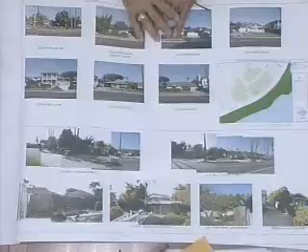So after being out on the site visit, you can probably look at the street scene, and this is the two backyards, and this is a street scene from across the street, another one from across the street, and this is the subject property right here. This is 1212 Shoreline, and 1214 and 1216 as you go up the street. 1218 and 1220 - this house has been approved for a 2-story over the garage, and this is the house next door, and the house next door to that. And beyond that is this 2-story.

So I can go over a few figures. We are at 84.08 FAR, so we're under 85%. This would be the 5th largest of the closest 20 homes.

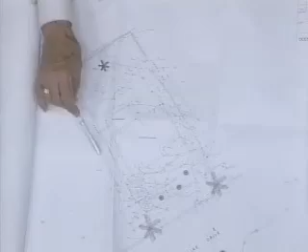So if we go to the site plan, this is the existing site plan, and this is Kathy Corn's property that we visited this morning. And this is a structure that will be demoed, that'll all be demoed, and then the house itself will be demoed.

There are some very large trees here and here, and then along the property line here, there's a very, very thick hedge that runs down through there. And the elevations of the existing house.

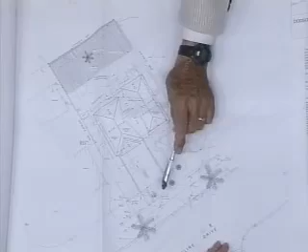So we're going with the underground garage, and the garage itself, the driveway itself starts here. There's a 9-foot city right-of-way at this point that we can take advantage of for the driveway.

On our first submittal, we were right on the setback line. We're at 6 feet here. And after meeting with the neighbor on site, I was able to move the house to 10 feet from the property line.

So floor plan wise, you come down the driveway into the garage. We have stairs coming up that exit to the first floor under the existing stairs. So you come up the stairs here, which is right here, and then you go into the first floor. And you have a kitchen area, dining, living room, and a bedroom here. And then in the back, we have a back porch

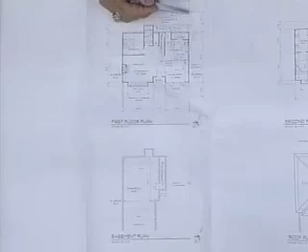That is partially covered by the cantilever of the second floor at this point. And then we have some beams, a trellis running out, which would be nice to plant on, with a little fountain here.

On the second floor, we come up to the second floor at this point, and we have a deck area in the corner here. That's the only deck that we have. Bedroom here, bath, master bedroom at this point.

Upon meeting with Kathy Corn, the owner of this property, I did raise the sill height of this window, and I made these windows smaller. So that would be on this submittal.

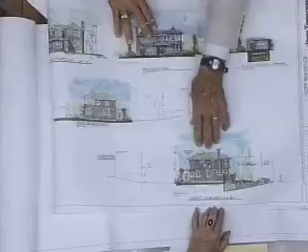And then meeting with her Friday morning, I was able to address this was the bathroom window, which was extending down. It was originally, it had a 5-foot sill. It has a counter in front of it in the bathroom. And so I made that 5'6" to the sill height, and then I made it obscure glass.

These windows here were about 2 feet wide, and I narrowed those to about 1'6" on both of these windows. And I'm going to use the glass that we all observed 2 weeks ago, where you can't see out on an angle, and that's what I planned on using there. I told Kathy Corn that we could make these obscure glass, but the neighbors really didn't want obscure glass in the bedroom. So we're going to use the type of glass that you can't see at an angle.

So this is the front elevation, and this is the deck area here, and a little bay window here. And what I was able to do, I was able to pitch both sides instead of running one big roof across. I was able to pitch it, and then I got a low pitch inside, which made the roof lower at that point.

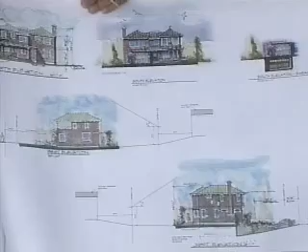This is the rear elevation, and we have a pergola coming off here. It'd be nice for planting to trail across here with a nice small fountain, and make a nice

shady back porch. This is the east elevation. This is the covered deck. I was able to project the roof out on a shed here to cover, comes out about 3 feet, to give the first floor some coverage there. And then we get a small picket fence along here.

This is an elevation of the garage door, which would be probably a darkened color, so that it wouldn't pop out so much, being that it's at a lower elevation. I think it would blend in nice.

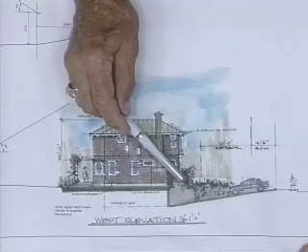This is a section elevation, and we have, this is the driveway going down, and then with kind of a low picket fence along here, which would be nice to trail some plants along to help cover the wall. And this is the back porch with a pergola above.

Did you bring a landscape plan? Not yet. I wanted to submit that at a later date.

How are we doing on the other points there? I think he's covered pretty much everything, he's addressed them. Okay, all right.

At this point, we have a slip here from Kathy Corey. If you'd like to come up and take a seat. Would you turn the mic on, please? You have 2 minutes to speak.

I'm again concerned about privacy, and I think at the last meeting you had suggested that the plate height be raised on all 3 windows. Then I met with Jim, my sister and I met with Jim Friday, and we discussed the plate height would be 5'6" with obscured glass, and that's what we had agreed to between us.

You have to speak right into that mic. Okay, and so now today I see it's changed, and I'm still concerned. I think previously the windows in the bedroom were 24 inches wide. Now they're 18 - actually it says 16 inches wide. A foot and a half. Yeah, they're actually smaller than a foot and a half.

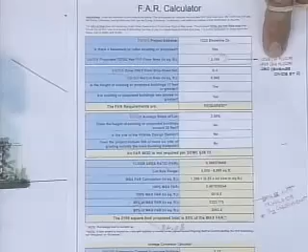Added to the first floor square footage? Yeah, or to the total square footage, basically, but it's added back in on this calculation, which is also FAR, but it's added back in to show where it relates to the closest 20 houses on how large they are.

Are you saying that it's added back in at 50% or 100%? 100%, yeah. Okay, thank you. Any other questions?

You don't show windows here, but I think on your floor plan you show windows on this side? You mean here? No, on the front. Let me see. Yeah, let's put that one. Oops, which way is it? Oh, is that underneath?

Here it shows two windows. Oh, it's a bay, with one off on each side of the bay window. Oh, I do, yeah. Yeah, they face south. Yeah, I do show windows there.

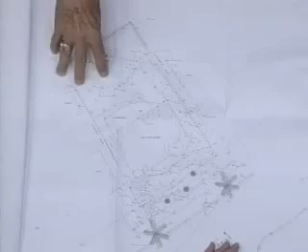Oh, there was a garage. This looks like it was an old driveway, and then they converted that into this, so that's how they got their garage coverage. Yeah, and this is a zoning violation. Right, and under the current zoning code you're required 2 covered spaces, correct? That's correct, yes. Thank you.

On the floor plan, I'm a little uncomfortable with this wall into the neighbors and the windows. I'm thinking this needs to be reduced a little bit, and I actually think maybe these windows should be taken out, just for privacy, because your primary windows should be on this wall. I don't know if it'd be better to have windows in here rather than there, but anyway, this wall I think needs to be reduced and the windows reduced. So that's probably my only comment. Otherwise, it's a nice style home. Okay.

Fred, comments? Yeah, this is a real dilemma for me, a real geometry puzzle. Because after we saw the story poles today, I was a bit taken back by the bulk of this corner, as it relates to, regardless of where the windows are, this yard. Go back to the site plan. Yeah, this yard—if you complete this drawing, the wall of the house comes like this, and then there's an opening for the garage.

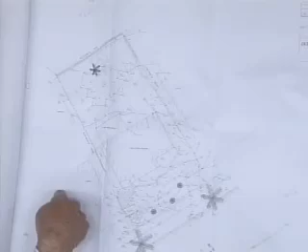That's the only private yard this house has, and we have this big corner that kind of looms over the top of it, regardless of whether it has windows or not—it just looms over the top. And I got to thinking that one of the dilemmas this project has is trying to get this garage under the bottom level to accommodate it. So here you have a lot, and the original house was kind of right up at the setback line, as I recall, and now we've pushed the house back to accommodate that distance to get down under, so you have a proper grade to get to the garage that's below here.

And you have this existing house that kind of does that, so this is not quite accurate. But it pushes the house so that this wall now is really facing directly into that yard, whereas if the original footprint was left in place and you did a 2-story based on the original footprint, that wouldn't be the case—that wall would be facing this piece of the house instead. That doesn't really solve the concern I think this owner has about the way the sun comes up, because in either case, a two-story, whether the house is here or here, is pretty much going to block the morning sun. I don't know that there's any way around it if you have a second floor on this house.

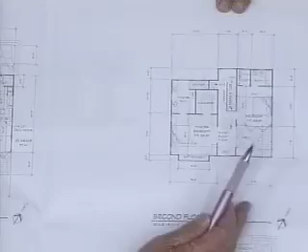One of the approaches is to switch the master bath and the wardrobe to shave this corner down. The other radical approach would be to just put the master suite on the first floor and move it that way.

That's why I was kind of asking about when you're looking at the whole neighborhood, the whole streetscape of Shoreline in this block, if you assume ultimately everybody wants to build a second floor, then how do you arrange the second floors along that street? So that if this corner house wants to have a second floor, where do you put those second floors?

Then you have this house, which is now proposing basically the second floor over the whole house. Then you have this one where Jim has indicated there's a second floor approved over the garage. Then you go down one more, and then this house, which has the second floor kind of like that, because this is where that garage goes in.

So it's about where you start to put the second floors and keep them away from everybody, because the lots are so small and the setbacks are relatively small. So that's kind of what my concern is.

My dilemma is, I can understand the applicant wanting to have 2 bedrooms on the second floor, a master suite, et cetera. It's nothing out of the ordinary, and the rooms aren't extraordinarily big. But the bulk is really bothering me in this corner.

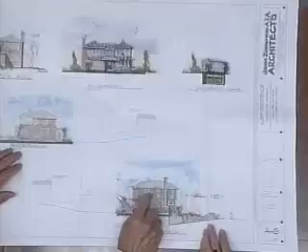So the windows, I think on this side, I would be more in favor of having windows here that were that size and mounted at the same 5 foot, 5'6" height.

Then I really don't care what the glass is, because for anybody to really look out and look across to the adjacent property, if that property has a second floor, they would really have to make an effort to look out that window and then try to look in any windows on that side, if it's up that high.

I shared last time that I've designed several master bedrooms where the bed is on that side, and we put little high windows to let light in. I just don't think those windows, given the circumstances of what we're dealing with, need to be tall and long. I'd rather see 3 of those.

And then if you look at this in 3 dimensions, which, when you're looking at flat elevations, is a little bit misleading, because you have to kind of look at that elevation with that elevation to see the corner.

I think this window is too big. For a bathroom, I think that could be much smaller, because one could stand at that window and at an angle still be able to look into the neighbor's backyard.

And to some degree even from this window, which is in the shower. So I'd like some rethinking about, if we're going to hold on to this corner, the size of these 2 windows.

And I guess I'm not convinced about angled glass at this point. I probably have to see it for me to be convinced. Let me see if I covered all my points.

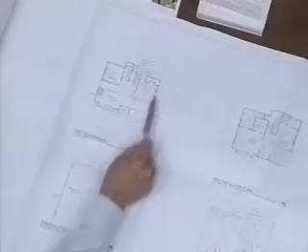On the other hand, if you had a project designed where the garage wasn't underground, then the question is, could you hold the house back at the setback line and create a garage there? That would require rethinking where all this stuff is, or where that bedroom is, because you'd have to get a ground level garage to meet the garage requirements.

By zoning, you have to have 2 covered spaces. So that's kind of my dilemma, and I want to hear from my fellow board members before I make a decision or comments.

Okay, Jamie? Yeah, kind of responding to what Fred just said. I was thinking, the way that curve of that block reminds me of Padaro Lane, how these houses, the first floor is built so everyone's view is maintained.

And ideally, it would be great if the second floor could do that in this area too, which would be amazing to accomplish. But I was looking at the glass block floor—is that just to get light downstairs when you enter?

Yeah, I've used that before, and it's a good walkable surface, and it brings light into the lower level. I really like that, but I was thinking maybe that's where we could have room to bring in on the west side, where you move the master bedroom over, take maybe the wardrobe and put it where the bed is now, and then move that whole master bath in a little bit. Just a thought. Thank you.

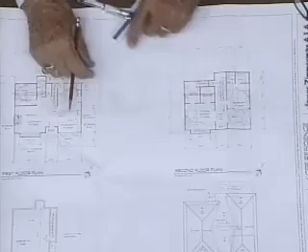No, you can figure it out. Let him figure it out. And that puts it over 6 feet, 7 feet from that corner, which I think will make a huge difference. That would make a huge difference.

Madam Chair, board members, before we discuss a hypothetical design, I think the board should take a motion on the project today and make very clear points. If you're happy with the exact footprint, or if you want the footprint reduced, it needs to be a very clear motion. Additionally, if you're not comfortable with the design, I would discourage the board from sending this on to the Planning Commission. We don't want any sort of misconstrued project that the board here is not very comfortable with, but then goes forward and gets a Planning Commission approval. So I understand the time frame concerns for the applicant, but the board needs to be reviewing this project and make a motion on it.

Michelle, if I could, just to clarify the process here. We can put together a motion, it will have comments, etc. My sense is the comments will require some redesign, certainly different windows or whatever. Would he go to Planning Commission with those comments? Or does he have to come back here and get those comments reviewed by us before he goes to Planning Commission? How does that work?

Well, thank you, Board Member Sweeney, but I think the discretion would be before the board. It really depends on what the motion is going to state. If the motion states reduce square footage and start to really tweak with the design, I would suggest they come back to the board before they proceed to the Planning Commission. If the board is comfortable with the project as proposed in this mass today and just wants windows tweaked or the shed roof pushed in, then maybe that could be something the board could take action on and pursue to the Planning Commission. But before we start making these hypotheticals, I think the board should look at the project and make a motion. The reason for that is if it gets to the Planning Commission, commissioners would ask what the single-family board said about this, and whether it's a different set of drawings than the ones they saw today. We want the project that goes before the Planning Commission to be supported by the board, ideally.

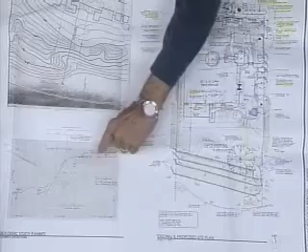As you can see from this old geological study, the entire yard behind the house is all fill — see that? And then it has these 4 little retaining walls. In fact, the house itself is on fill. As you come up the street, the street's on fill too, and every 2 houses past that is a 4-foot wall going all the way up to Cliff Drive. As we previously discussed, the natural bluff edge still exists, buried beneath the fill, and the natural bluff edge is used for purposes of defining development setbacks.

So we expect in the next 2 weeks that the planning staff will change their position and measure their 50 feet from the bluff edge. We've had this surveyed — the bluff edge has retreated 1 foot 6 inches in 25 years from where this is shown, and here from where this is shown it's come back 1 foot 6 inches from that point. So if you measure 50 feet, we're only triggered to the Planning Commission because they were measuring it from the top of the fill, and it came 50 feet here, and it cuts across like that for 2.5 feet down to 0 right there. That got us to the Planning Commission, even for an interior remodel, moving a toilet, anything.

So we think that 50 feet is going to be remeasured with this new information for Danny and those above him. But we go forward as if we were going to the Planning Commission, not just the staff hearing officer. You can see the overheight hedges and trees that currently exist between the 2 homes. It's an amazingly small project — you can imagine Mr. and Mrs. Hoffman's surprise when, adding these 2 small additions, this suddenly became a big project. Their architectural and landscape improvements didn't seem to be a concern, and we've had no opposition for the right-of-way improvements or the improved view of the residents through the hedge, giving it a more residential street view.

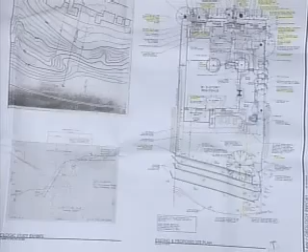So with that said, I'm going to turn it over to the landscape architect, Sam Maphis, and let him, starting from the street forward, tell you the improvements he has made and suggested for the property.

Okay, thanks Raymond. I'll go back to the site real quick and bring it into context with some pictures. The existing planting on the street — I'll show you some context to this hedge out here. To describe what's there now: there are 2 — I think you have those photographs, another set with you also — large existing Myoporum that are going to remain. There's an existing Pittosporum hedge along the street that's kind of mixed heights and needs some care and trimming for it to fill out better, and our intent is to do that.

We have a large existing California pepper, and this is just a large existing Pittosporum. So we're taking the new walkway through this berm area, and that's the opening you see in the bottom photograph.

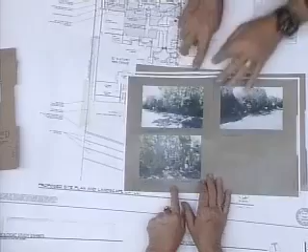There's an existing Brazilian pepper here, and these are existing black acacia, and there's a large existing Monterey pine here. Those are all to remain.

There's some big lemonade berry, and this is quite a rough bank of overgrown Rhus integrifolia. We're going to be taking that out and redoing it with some small planters, and as Raymond described, a stairway and arbor. I'll show you a picture of that in a minute.

To go to another context, just to give you more of the streetscape, this is what we look at down the street and across the hill.

You can see the sloping aspects of what Raymond described continuing up towards Cliff Drive, so there's a retaining wall holding their front yard, and as it goes up there are small three-foot walls that hold most of the yard spaces.

So our intent is to do that terracing on our downhill side and create quite a nice little entry court, which we don't have now. It's in disrepair.

And then this is the context of the actual residence. This is the front door. This is the garage area that you see here, all to remain.

This is the little infill pocket that Raymond described that'll increase the kitchen size. We're still keeping a planter. This little mayten tree will be taken out in this design, but we're planting a new tree in this area. You have that on another sheet - I'll show you that in a sec.

This is that side yard garden that goes down the east side, which I don't really have a good picture of - right in here, that's that.

And then this is the back of the house showing how these planter beds in this area are going to be converted to stone and masonry to match the rest of the stone and masonry on the rest of the architecture. So just to describe the front one more time, we are going to be opening up this area.

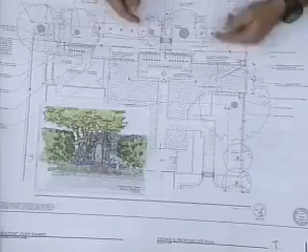The picture that's a little blown up is this large pepper tree. This is the hedge that needs repair. We'll be planting this - I'll show you in the landscape plan - with some low-growing ornamental Fragaria chiloensis and some heuchera underneath the shade because this is the north side.

This is all right of way, so we have to keep everything low. There can't be anything tall except for this hedge. So that's the context of the entry.

Again, he described this little Juliet kind of double balcony. I have a picture of what that looks like because we don't want to encroach on what's already a tight turnaround motor court. To describe some of those elements, you see this as you come through the arbor.

That's planted with climbing honeysuckle and geranium. This has some stephanotis underneath the shade. This planter is planted, you'll see in the landscape plan, as well as these two planters on both sides. So I think it's framed quite nicely.

This is the section that shows how the arbor comes down, and it's ramping over a little high ridge. It's actually a mound, and then we're coming down to the steps that go into the motor court.

Another area that we'll be improving is a chain link, or actually wood gate, that's the motor court entrance. We're going to be putting in some stone pilasters that match our masonry and some nice wood gates that match the whole flavor of the cottage architecture style.

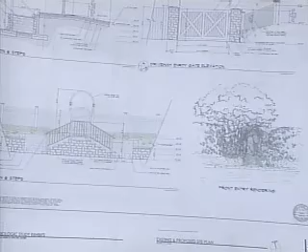To continue on, the landscape plan will describe that. It wants to be kind of a coastal cottage.

So again, the low planting in the front. This is a site plan that shows carpet roses and some festuca glauca behind here, and some geranium in the front, and some armeria, so we have some sea pink here. We have some camellias, viburnum, roses in this area. Another arbor kind of surrounds this area.

Right now there's a big fence that takes away this big, large Brazilian pepper from the courtyard. We're going to open this area up and make the perception of the front area much larger than it is now. Right now where my hand is, it's all solid fence. Opening this up to the front yard, closing this off with picket and another arbor going into this more private part of the outdoor garden patio.

We're adding a fireplace, a spa, an outdoor countertop and kitchen. This patio pushes out a little bit so we get the view here, and this is the stone garden spaces and walkway down to the existing lawn. All this stays existing. The only treatment will be a little bit of planting up against the base of this patio. This will be vegetable gardens.

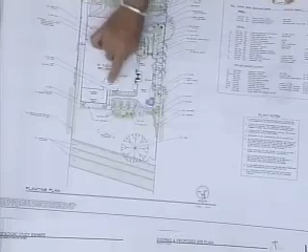It is currently, we're just going to improve that. Foundation plantings of roses, limonium, some grasses like miscanthus. These are some of the other elements. This is a metal spa we'll be using from Diamond Spas. This is the arbor that goes into the back garden. This is the fireplace and kitchen area that's on the side of the property line, inside the setback, of course.

So those are the main points that I wanted to bring up in terms of landscape. It's a very good quality upgrade. We are changing the paving, as Raymond mentioned, to a Belgard paver, Thunderbolt paver that is all flush. We do have a brick walkway that encourages the alignment to the front door for the pedestrian. This is all flush to the motor court, so it'll be driven on. It matches going back into the brick patio in the back. We'll be using some stone headers that match all the different stone masonry elements. So all of the continuity of materials is going to be throughout, from landscaping through the architecture.

Thank you. Okay. Any questions on the landscape?

Not yet. Yeah. Yes? Well, we're not quite there. The architect still has to present. We'll do that first, so let's finish this presentation.

I'll add just one little photograph. This is looking from the inside towards where the last owner had a basketball goal, right about where you can see the little place where we're going to put the arbor on the inside. Currently there's this retaining wall, and there's stone facing, as you'll see, stones being added not just to the columns, but all around the home. This will all be stone faced now, and these are where the little stairs come up to this new arbor here. Here you can see the edge of the garage. You see what it all looks like now.

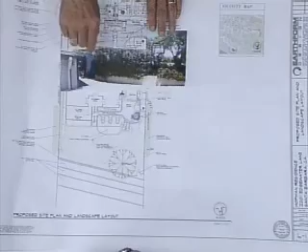And this is that lemonade berry bush, which is going to be removed. It's about 8-10 feet tall, and then the planters that are hidden in there. He's putting in the low planting flowers in here, all along here. And way back in the corner, you see the trash can corral; the stairway is kind of off to the side now.

All right, we'll go to this. If you want to roll that out, or... is it in here?

I asked the architect to just add some more notes to the A10 sheet. There's notes added to better define the fireplaces, how they were brick and they're now being stone faced, and so on. So we're switching out the A10 sheet, giving you all new A10 sheets. It's exactly the same sheet, just with more notes added and some definition added for the outdoor fireplace.

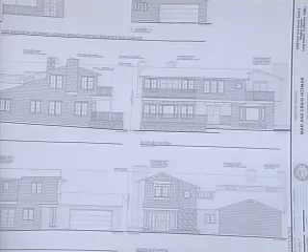So we are looking at doing a home that resembles a coastal home that you might find in Nantucket or somewhere back east, where we're looking at shingle siding or real shingles, box columns, painted wood trim, wood shingles, windows that mimic that architectural style, and then using coastal stone and elements to create a little bit more interest.

So this is the front elevation, and as you come down from the street through the arbor, this is the first thing that you're going to see, and it's really the welcoming mat to the home. So it's very important that this element here gets a lot of that traditional detail that kind of sets up everything for the rest of the home, the landscape and everything.

So as you can see in the existing photos, here is the front of the house as it is right now. So we still have the bay pop out. We still have a porch. We have some, I'm going to say, strange detailing of corbels that we're going to take off.

We're going to take this wood trim off, this clad siding, and then kind of rework it. This high gable here, we're removing. We're going to shut it down. It kind of brings that whole element down. Raymond calls this the church window. We're going to take this off, do more of a coastal window. That's a stair area here. And then anchor the house down with some stone.

So these are the details now that we're going to take and put throughout the entire structure. It's a continuation of the details that start from the front. So from our front we have the stone. As we march around the side of the building, you still see the trim, the wood trim, the shingles here.

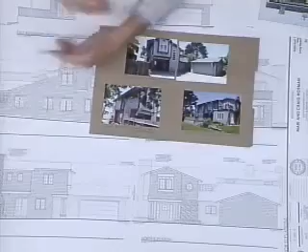And what it does is, first of all, it gives us a really nice outdoor fireplace. But it gives us a chimney that actually projects out beyond this plane, and it creates more interest, and it breaks up that side a bit, and we don't lose that detail anymore. And then we're following through with shingles and corbels. All the pickets on the existing decks and patios are going to be redone.

So as we go from the side, we go around to the back of the home, this faces the ocean. Again, it's all the same detailing, the same materials, we're following through. The windows, kind of the coastal windows we see in the front, we continue in the back, so we have that continuity. We're adding stone from the front as a base for the existing patio.

We're also proposing a bay window off the living room here. It kind of gives us more light and more view out towards the ocean. With this bay window, it gives us the opportunity for more stone on the base. This would be painted out just like the rest of the trim of the building.

And then we're also proposing, on the second floor, this is the master bedroom, to add a balcony or a patio, a deck if you will, off of the master bedroom. It sits over the existing patio below. It doesn't project beyond the sides of it, and it doesn't project out as far, so it's within the shadow of that existing patio below.

And then as we wrap around to the last side here, this is all existing, we're reskinning it. This is the existing patio, and this is the proposed deck above. And then we're adding a fireplace in the master bedroom.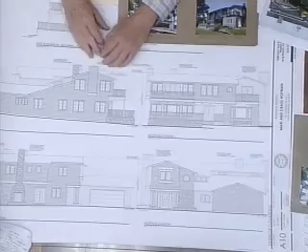Can I use this for color?

Sure, this is the first rendering of the home that we did. It doesn't have everything. We widened this fireplace, so that's not shown in this, right here, yes, but pretty much everything else is the same. It gives us a good feel for what the house is going to look like with the wood shingles and the painted white trim and all of that.

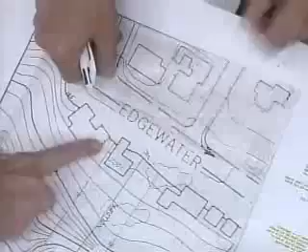It's probably on the front sheet or one of the front plans. There it is, right here. Their driveway comes down. This is their garage. The deck will be out here. Okay, so essentially it's just a garage here. That's right. And their orientation is spun further to the west as well. Yeah, all of their windows and orientation is this way. Great, thank you.

Any other questions? Yes. I have several, but most of mine, I think, are to staff. Let me attack the first group.

The hedges and the arbor entry, right up at the property line, are they asking for modification? I know the fence is being asked for modification. Do the hedges and the arbor entry require a modification? Retaining the big hedges in the front? It's in the right-of-way, sir. It's in the right-of-way, does that require modification? No, it does not. Excuse me, I'm talking to the staff officer. Would you please clarify for me: do the hedges and the arbor require modification?

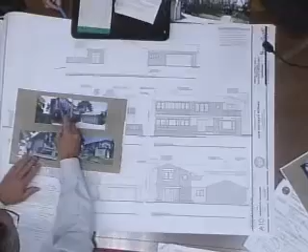Over here on this elevation, in the existing photograph, there currently appears to be an attic vent. So I'm assuming there will be some other way to deal with that? We'll deal with that in venting, but this whole structure is being removed at the top here, and the low roof is going. I understand that, so that goes away, but you still have an attic beyond that, I'm assuming. We do, we can vent it through various means. Okay, so you won't have a vent there. No.

And then it appears, based on your sketches, that the little roof over this cupola is going to be sheet metal versus something else? The rendering shows a standing seam metal roof. Okay. And the main roof is going to be re-roofed? Yeah, in asphalt shingle. Asphalt shingle, okay.

And the balcony square footage, this one on the back, how many square feet is that? Do we know, do we have that listed? It's on the first sheet - oh, one more sheet. It says it's right here. Second floor deck, is that it? 129 square feet. Okay, it's about 6 feet wide.

And on your rendering, but it doesn't show up on these sketches - on your other little sketch you proposed a cupola, is that still going to happen? Cupola's out, okay. Roof materials we talked about. I think I heard you say you're going to replace all the current so-called corbels with new corbels, correct? We are removing that. They're all going to go out? Yes.

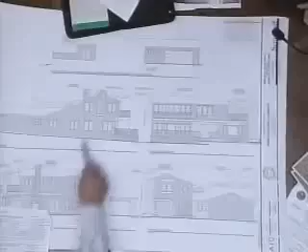And then the chimneys, this one and this one - I assume that gets added as square footage. But what I didn't understand, let's go back to the floor plan - are you adding some square footage on that side of the house? We are not. That just flushes out and comes this way into the yard off the back of that existing masonry. So that's on the first floor, and on the second floor the chimney pops out into the second floor, it comes out this way. So the new chimney is going to be outside there? Correct. Okay, that's what was confusing me.

So there is some bump out, square footage wise, of the chimney, okay. It is the outdoor chimney. Yeah, no, I understand, outdoor fireplace. I understand. Let's see - roof, chimneys, balcony, we talked about.

Jim, you have any questions? So we can give them comments, not concepts, right? It's comments only. And how many modifications are you asking for? We're asking for two modifications. Does that cover everything? Let's go back to that super large close-up.

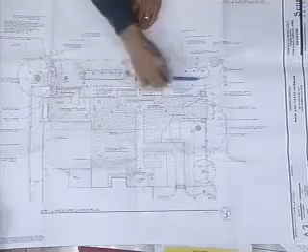And then we need positive comments about replacing this existing wood plank fence with a picket style, continuing that picket fence in the right-of-way back here, and the arbor and the brick walkway. Yeah, and those are comments to the Public Works Department.

Getting back to the site plan, the geologist gave you a structural setback, right? Well, right here - that's on the previous plans in the archives for the building since it's been built. There's been no update on the structural setback. No, and none of this is required.

It was, the only question was where we measured from the top of bluff for the 50 feet, whether or not this 2.5 feet triggered the planning commission or we stayed in scope. I think once they read what I got in the mail Friday, that 50 feet is going to be measured from here - it can't be measured from top of fill. So we probably won't even be going to the planning commission. Okay, we're going to the staff hearing officer.

All right, any other questions? Yes, Lisa. Just a second, question for Sam Maphis. The question about the proximity of the proposed stone edging to the existing Brazilian pepper - if you think that could be problematic with roots or...

Well, it's a healthy Brazilian pepper. I think the intent of that cobble edging, Lisa, will be a little shovel of concrete and then just cobble stuck in, so the actual excavation might be 6 inches or less. So we're not going to be going into any major root systems structurally. I'm sorry, maybe I wasn't clear - I wasn't concerned about damaging the tree, I was concerned about the tree's roots damaging your hardscape.

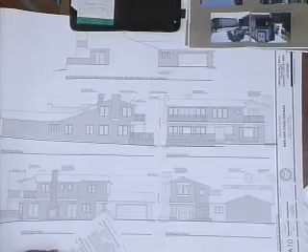And certainly we're going to be interested in the detailing, the balcony and the wood and some other things. But I think short of that, I think it's a nice approach. I think it's a good project, yeah. I think everything's been explained. I think so too. Everyone feeling good about this?

Positive comments? All right, let's - I'd like to say something. Yes, I really like how you made the pedestrian entry and the car entry a really nice space. It feels like a courtyard, it doesn't feel like a driveway, and I know that's what you were intending on doing. You did a good job, and the way that you did the stairs to optimize the space for the car coming in - I just think it'll look very elegant. You did a nice job.

Thank you. All right, then let's send this along with...

Madam Chair and board members, just two quick comments to remind you regarding the fact that they're requesting modifications - to include in the motion the standard modification language, and to explain how and why they are aesthetically appropriate if you find such, and if there are any adverse impacts. So just be very descriptive in that regard for the motion.

Okay, and who would like to formulate this motion? Madam Chair, I would suggest whoever does - maybe the applicant could take us through each modification one at a time, because he knows the modifications, so we can make comments pertinent to those modifications.

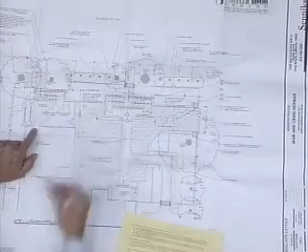Okay, now the second modification is the height of the railing and the height of the automobile gate and columns. Okay, and so for the second modification, the board finds no concern over the 42-inch height of the railing at the stairs, nor the 6-foot 6-inch height of the columns, or the 6-foot height of the entry gate, driveway entry gate on the east property line. Okay, that's it.

What else do you have to have? Don't we have to say anything about that? Well, Public Works, David, would like to hear just a positive comment about the brick walkway with the arbor and the picket fence. Okay. So the board looks favorably upon the adjustment to the existing landscape hedges that are in the right-of-way, that the proposed brick walkway and entry arbor and picket fence within the right-of-way are an acceptable design.

And that, in general, the board is in favor of the square footage. The board's motion to the full board is that the applicant define the locations and shapes of new and existing window locations, and that be clarified. That color board be brought back at the next visit. The square footage additions are acceptable, and the board looks forward to looking at the details of the finishes, the decks, and the appendages applied to the exterior of the house. I think that's enough of a motion.

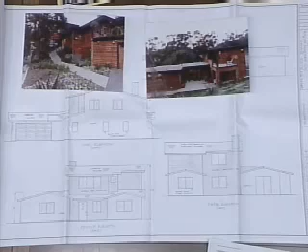The house that they liked, that this was started after, was this house, the one that got us started, and it was all wood instead of wood and stucco. But so much of this house is already stucco that we're just featuring the wood rather than making it completely wood.

Now at the bottom of La Coronilla, right at Meg's, they've gutted a house, taken it to the studs, and are rebuilding it. So that must have come through here, and it's being rebuilt with aluminum windows because it's the best mid-century house in the whole neighborhood.

Now the next is the failing railroad tie retainer being removed, and my client doesn't need such a big side yard. The last guy was a tree guy, and I think he put all his equipment there, the trailer and the big truck and the chipper and everything, so he had to make it bigger. I'm going to let the hill come right back down, not quite to the ground, but I'm farther over.

I'm going to put in about a 2-foot tall keystone retaining wall. And also on the plot plan, I am putting a keystone retaining wall in the front to lessen the slope. It's very steep right here, so I'm just lessening it with one retaining wall. It'll still be somewhat of a slope, but not totally.

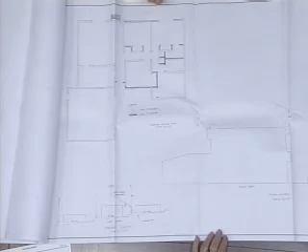And as to the solar access, I just drew a couple of sections through the house. The upstairs is going to be the classic 3 and 12 pitch, big beams, T&G ceiling, and the glass beyond. There is the solar access, that's the outline of the house, there are the neighbors, that's the height of the ground on the neighbors. There's your 12 feet up, your 30-degree line. I'm 6'6" above the apex of this house, so I'm well below it.

And as to the tree in the backyard, we're talking to the neighbor and my clients, they're going for cutting it down. I guess every house in that neighborhood had that same tree. When the developer built them, he put that in the backyard, but everybody else has already gotten rid of it. The last guy that owned this was a tree guy, and he liked it, so he left it. My client didn't care, it was bothering them.

It's a Shamel ash, a weed monster tree. It's got to be 45 feet tall and 35 feet around, and it keeps dropping little seed pods, and they go over the fence. He takes out 2 to 4 trees every month. So we're just getting rid of it.

We're making a very mid-century landscape, mostly very drought-tolerant plants. They don't want a flowery type yard, it's mostly shape and texture plants. They get color from the leaves and the mass of the plant itself rather than being real ornate.

And just about every plant is low water use, and they're making a slight DG patio in the front. We're building a poured concrete bench to have it like, they can't have a porch, so this is kind of like a way to sit out in the front. And one small lawn area in the back for the grandkids and dog.

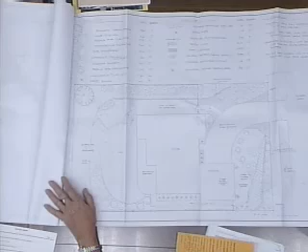And this little retaining wall moved over. It used to be back here, and it was 4 feet tall. It's moving over here, and we have to dig footers around the entire house. There's no rebar in the foundation of the house, so I'm going to gain a lot of dirt so I can fill in that gap that's missing with the dirt I dig from all the way around the house.

Okay, so that is the change that's made. I have 2 slips here.

Pictures, oh I forgot pictures. Do people want to see more pictures? Yes. So these, I think, are the 4 closest two-story homes. And then on the inside, I just put a whole bunch more. I just took pictures of every 2-story I could see and got a bunch more on there.

I'm assuming you want to go between neighborhood compatibility and fitting the single-family design guidelines. I'm going with the single-family design guidelines rather than the neighborhood. They don't necessarily match.

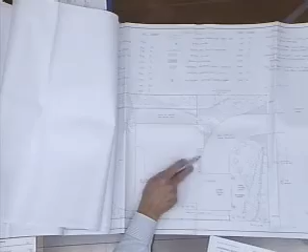Yes, gravel behind it. Then on the entry here on the east elevation, on the plan, it shows on the landscape plan, some planting I think. That's my question on that. I understand the drawing, right here. There's little bits of dirt there. So there's going to be some kind of walkway entry. Yes, it's only about 4 feet from the driveway. So that's just like a little 4-inch concrete block.

Tiny bit. Okay, and then on this elevation, I don't know where the photographs are. Are these two existing windows? Oh, this one is, this one isn't. So this is a new window. That's existing. Would that retain, or are you going to replace it? Yes, basically it's in the same location. And that's a new window. That's a new one. Okay.

And then up on your south elevation, you referred to the iconic mid-century shape of all of that. A lot of the mid-century were built as post and beam. So is there any kind of beam element that's coming beyond the face of the wall? In other words, up here or here or there? That will be the place that holds the barge rafter. Right, but will there be a beam extended? There will be, but it's not beyond the edge of the roof eave. No, okay.

One of the things, we're still here for concepts, so one of the things I'm going to be interested in when you do come back is how you're going to deal with downspouts and gutters, because I think that will have a big impact on what this house looks like.

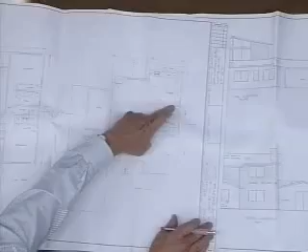Up on the second floor, let's see, where am I? Over here, this space here. So that window and that window are those two windows? Yes. And so on the first floor, that window's over the bathtub? That is where the bathtub was. So the bathtub is coming right up to the bottom of that window?

Well, is it lower? The bathtub's, because the finished floor is, where is the finished floor? Is that line right there? Slab on grade. Okay, so that's the finished floor? Yeah. Okay, and then that's a window, are these casements, or what are those? Awning. They're awning windows? Yes.

Okay, the bronze anodized, right, no, I understand that. And then the bank in the backyard, I guess I think I understand what you were saying, but I want to go back and look at your landscape plan.

Right now there's the railroad ties that are in here, is that correct? Yeah, they're a little farther back. Okay, so those are going to come out, then you're going to keep the taper going? Keep the taper going, and then this wall here is going to be 2 feet, more or less, all the way over to here. And then that's with the slope going up the back. Understand. Okay.

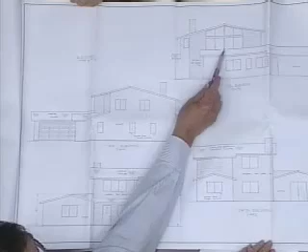So where is the floor line with relationship to that? Right about the top of the fascia board. No, the top half. Right there. How high is that distance, more or less? I think it's about 30 inches maybe.

So it's not going to be 42 inches. Well, I can, you don't have to if there's a roof beyond. So you're thinking of putting one rail across, but it needed to be the height that matches, so that from the front it all looked correct, same pitch. The detailing right there is going to be a challenge. It may just go rail across, back and back.

And then a question to my colleagues just to think about - I'm not promoting them one way or the other, but would this be a project for story poles? That's my question. Thank you. Okay, any other questions?

Questions? Would you explain what happens here? Are you going to continue that roof down there, or does this stick out in the front? So this is just the roof over this.

So what happens on this elevation, to this? Is that there, right there? Oh, there. I mean, it just ends up being nothing, it just tapers off. It comes down because as you go farther up the pitch of the roof, you go until you come to a wall.

Okay, that's all. Any other questions? Comments? I'll comment. Staff is here - do you have any things you're supposed to say?

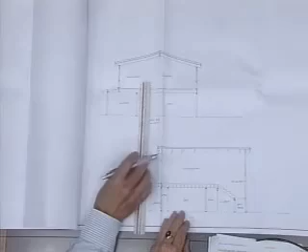I have a question. What is your plate height up above on the 8 side? 8 and 8? 8, 8. 8 foot and 8 foot. Oh, 8 on the bottom and 8 on the top. Okay, ceiling - it's 9.5 feet if the scale is correct from finished floor to finished floor. What's that? The floor has thickness. Yeah, no, I understand - 8 foot to plate. Yeah, 8 foot slab to plate, and 8 foot floor to plate. Understood. Okay.

Any other comments? Yes, Brian - I think you're going in the right direction. I do think we need to get story poles because of the concern. But I think, if you look on this plan, it looks like the roof does something like this.

I think that might help Jim. That's kind of a strange... it's unfortunately, but I grew up, so that's kind of mid-century to me. The other thing I see missing, only thing, and it's not really missing, but Fred was talking about some beams. It's real common to see that. But otherwise, I think it's going in the right direction. Those are my only comments.

If you're requesting story poles, could you give me some indication of how you put story poles on a second story without puncturing holes through the roof? Yeah, we can show you several. We sandbag, just saw one this afternoon. It's pretty straightforward. I could put them on the ground. A good contractor will know how to do them. Any other comments?

Madam Chair, yes, you want to go? Doesn't matter. Well, I called Bernie.

I was just sort of thinking out loud here that we never have a way to see other examples of second stories put on with the single story, but we don't know what the other surrounding homes look like. We have the 20 closest homes, but nothing shows how large the second stories are of the surrounding homes. That would be helpful, because here we have 758 square feet, which seems pretty big. But if everybody else in the neighborhood has been doing that, or at least there are several examples, then we're meeting our guidelines. But if it's the biggest one ever, then—you don't have to answer right now—but when you come back, you could maybe go on the computer and get the next door neighbor or one down the street and get the size of that one.

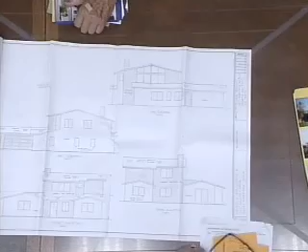Madam Chair, also just a small point - put the north arrow where you can spot it on the plot plan. You've got it kind of in the middle of the yard, so if you could just put it near where the scale is. And same with the landscape plan, put a north arrow, because when we're looking at plants, we need to know the orientation of the sun.

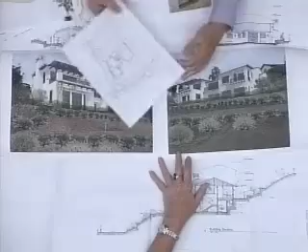Forgive us for the type of vegetation shown; we just didn't have time to massage that into what the true vegetation is, but this is an accurate depiction of the site. These are the 2 shots you're seeing here: this is the eastern one, and this is the western one.

Bring it down a little bit for the camera. Sure. On this one, we wanted to make sure we got an accurate depiction when we took the photographs of all the buildings behind. This one here in the computer is actually up 10 feet in the air, so you're standing lower down and don't even get to see this amount when you're on the roadway. When I took the photograph, I had to stand on the little railing post they had. But we did these so you can get a feel for the dimension, how much play there is going back and forth, and the depth where all the glazing is.

This is the type of glazing system we're using. Here's a picture where we have glass doors, and we've also done a cut sheet that shows the section through the material, so you can see the steel versus glass for the records.

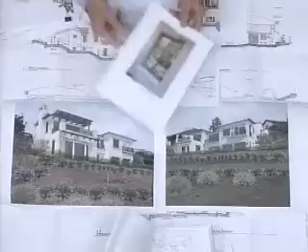In addition, we've taken the opportunity to walk around the neighborhood and photograph the buildings that surround these construction sites. This is a building right above Mr. Thibault's property—actually this one is behind this one, and this is the one right above his property. This is one at the end of that trio of homes being built at the pinch of the hairpin turn. This is another one right above the construction site with glazing under the roof. This is being built above the trio of homes right now, and you can see the type of glazing they have there too.

We're not in any way trying to say that this is something we'd like to do. We're just going to give you an idea of what is around. This one is across the street from Mr. Thibault, and this is Mr. Thibault's house, right next to this project. You can see it there. As you're down on this hill looking up at the project, with the vegetation it's very hard to see the lower floor; you really only see the upper floor and the trellis. You can see how this view is developed that way.

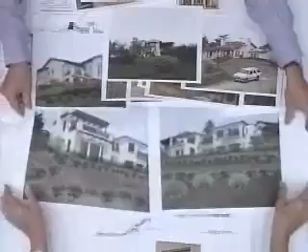So that was number 1. Number 2, the board appreciates the reduction. Thank you. Number 3 was okay, provide plate height dimensions. We did that in this section here, so we've put the plate height dimensions in there so you can actually see instead of just reading off the numbers.

Provide color and materials board. So here's our color and materials board. This is our color here. This would be the garage doors, the tails of the eave rafter tails. On the three-dimensional image we gave, we have our wooden outriggers here, but we haven't massaged it as yet to get the tail ends just right.

Provide cut sheets of the proposed windows, and that's in that cut sheet that I left you. We also brought, just as an example, how we have the glazing in the back and the overhang and the columns in the front. This is an example of a building that was already built, and we just want to bring it along to show how that depth really affects the building and having the glass behind.

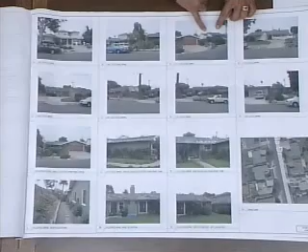So I'm going to walk you through. This is the immediate neighborhood. This is the home south of the project, this is our client's home, and as you go up Loyola Drive, this is a two-story home. The roof lines are pretty similar because this is at a lower elevation. As you go up higher, this is just a single-story home, but the ridge line is considerably higher than our client's home. This gives you a view of what it looks like aerial. You can easily see this is the two-story home that is south. Again, the immediate adjacent properties and the homes across the street are just single-story, and these are the elevations of the home across the street.

There have been some improvements to the home since it was originally constructed, but the size of the home remains the same. There's a two-car garage that sits in the front of the property, and then the main area of the home is that rectangular shape here. We have a lot of open yard and a lot of space on the side yard on the north of the property.

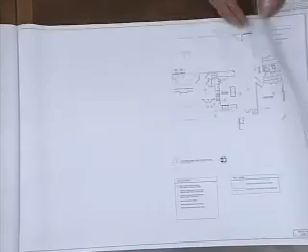So the footprint of what we're proposing remains the same. What we'd like to do is update the kitchen, and take this wing of the home and reconfigure the bedrooms and bathrooms, using this space here to enlarge the kitchen, give them a more generous dining area, and take this space for second story circulation. Some minor changes to the existing doors and windows. Again, the footprint of the house remains the same, and the second story that we're tucking here is inside this roof line. I'll show you the second floor proposed plan.

This is where our second-story trellis is. It's tucked between a second-story addition and the roof line on the south property line of the house.

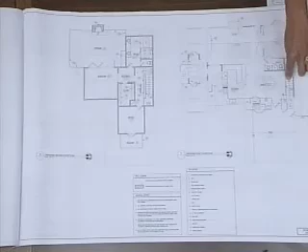So the open walls represent the walls that are existing to remain, and as you can see, most of these walls are going to remain as they are today. We're doing a little bit of changes to this bathroom, and this bedroom became a staircase for circulation to the second floor. This is the second floor, it's about 660 square feet, all new square footage that we're proposing. The circulation comes up to a main hall. It's really a master suite, and this is our proposed trellis. Again, this trellis is tucked into the rear yard of the house between a roof line and a second story.

So the elevations of the house right now are clad windows, there's stucco on the exterior. What we want to do is a smooth plaster trowel finish with an integral color on the first floor of the house, and we want to add shingles just to change the texture and add a little bit more character to the second floor.

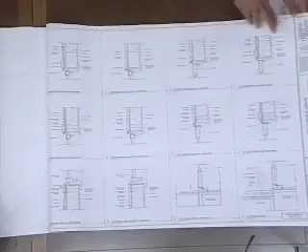These are the interior details, which you probably aren't that interested in. For the exterior doors and windows, there would be wood with a clad exterior, and we'd put window trim around it with shingle siding.

It's 85%, or just below 85%, of the FAR, so we did not come prepared to do a neighborhood compatibility study, but we submitted today two letters of support from two of the residents in the immediate neighborhood. We're hoping the board is in favor of the project, and we're anticipating a submittal to the building department, as they would like to begin construction this summer.

Exterior lighting is included here. I know your board's not interested in seeing the interiors, but that's just something we've started on. For exterior fixtures, we like to see iron and glass fixtures with an opalescent, milky glass, so there's no reflective qualities.

Okay, thank you. I see no one here for public comment on this project, so we have some letters.

Thank you, Madam Chair. I wanted to first announce that I received a phone call from a neighbor, Greg Leach, at 237 Loyola Drive, two doors down from the project site. He requested that I express that he's personally opposed to the rooftop decks, as they impose privacy issues and create a third-story recreation floor area. We also received two letters of support: one from Michael and Sarah Paskin at 207 Loyola Drive, and one from Don Gordon at 208 El Monte Drive.

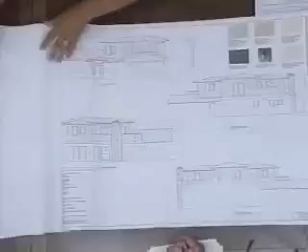You can see the outline of the homes a little bit better here. In the aerial view with our neighborhood photos, I'll show you the distance between this home and the property line. The second-story addition is going to sit inside this roof.

We'll open up questions from the board. So essentially, the architectural vocabulary of the current house has had some upgrade and remodel. Based on your elevations, my sense is you're not dramatically changing the vocabulary? No, colors are changing, but this will not be. This is going to be painted, so all of the windows and doors on the first floor will be painted.

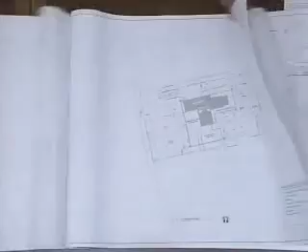This is the existing home here. We'll do a smooth plaster coat with an integral color, taking the same color as the body of the house with the plaster below, and we'll do the shingles above at the second floor. Again, we felt like changing the texture helps to break up the massing a bit.

Do you have a section through here? No, I don't, I apologize for that. This is just raising the roof a little bit over the front entry; this is the existing roof line of the house. And the deck is the 400 square feet described here, this terrace that's identified as a terrace? Yes, that's correct, 400 square feet.

Thank you, any other questions? Yes, Jim. Could you locate that deck for me on the site plan? Yes, see where it is. So if this helps a little bit, this is the second floor deck. This is the ridge of this roof line, which sits like this, and this roof line dives into the second floor above. This is the second-story element, which I think has a hip at the end.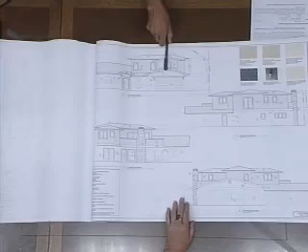And then there's another deck out in the front? Yes, there's a little deck here that sits in front. Is that covered? I'll show you on the front elevation. No, it has a gable end in the front, similar to the garage. This was one of those funny challenges: the gable is not centered on the garage doors. We wanted to mimic the same architecture by putting a gable above, so if it looks a little off-center to you, the doors and the trellis are centered on the ridge line of that second-story massing.

So how big is the deck there? I guess it's on the street, right? It's not on the street, it's tucked. I understand the back one, but what about the other one? This one's in the rear, backyard, and the other one is over the garage. So it's over the street, facing the street, but it's not over the street. But if you're on the street, you'd see the deck, just above the ridge line you'd see the top rail or top cap of the balcony. Okay, I get it, thank you.

Any other questions? Comments? Yeah, I appreciate the neighbor's concern about the deck, whether he understands if it's on the second floor or third floor. 400 square feet is the size of a two-car garage.

Greg was here, he was the gentleman I met him at the... So let's see, oh, second floor. Okay, so this is the area we're talking about.

Yes, and I'm just looking at it in relationship to the size of the house, et cetera. It just seems like a big party deck. And I'm a little concerned that even though you've described how it's tucked in, between the second floor and the roof, so from a visual standpoint the impact may be reduced, but it's certainly a big deck. I have the same feeling about this deck off the office, and given the function, this seems to be a little more than necessary. So that's a concern.

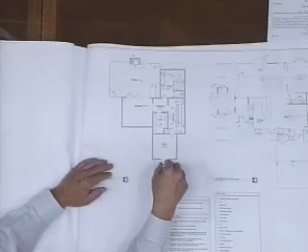And then a comment on the architecture: the relationship and proportion of where these windows are, the composition here bothers me a little bit. This is done quite nicely, but this looks a little awkward. And the other place that looks awkward to me, maybe that's why I was asking if you had a section, maybe I'm just not reading it right, this looks a little awkward too. The elements are kind of correct, but how they're put together isn't comfortable to me yet.

So if I can help explain this, this is in gray because it's an existing wall, so it's sitting back. This is the outside wall, so this is the entrance to the house. The door is actually set back, and that was one reason to try to maximize that glass area. As you come in, it's a low plate height, but there's a lot of volume in this space as the ridge comes up. So what we wanted to do is break through that with a new gable, just to help identify where the front door was and use some of the height that exists. I kind of understand it, it just somehow doesn't look right.

And do we have a roof plan? We didn't have a roof plan. No. Okay, and I guess that's what's kind of helping me put it together. Anyway, those are my comments.

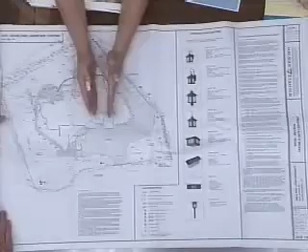Okay, well on the square footage, I'll go over that first. We did take some square feet off of it, but not very much. Looking at what we had, I go to the site plan here. We reduced this area, so the width into here is a little bit narrower in here, and this was a little bit narrower in here. So we did take some square footage off, not too much, because the clients were really happy with what they had and wanted to retain pretty close to what we had presented.

Last time we were here, we were at 92% on the FAR, and it's almost a 23,000 square foot lot, so it's a very large lot. Also, I want to remind you, in case you've forgotten, that a lot of the square footage on this property is the understory and basement, so it does not appear as large as what the square footage gives you an impression of.

Also, I did get the assessor's data, and on one of the pages you'll see it, the square footages for the surrounding properties. So I don't believe that it's really out of line. This property over here is almost 4,900 square feet, so we have 24 - we have some 3,000s in there. So relatively speaking, I think it's appropriate for the neighborhood.

And like I said, once again, we have a lot of square footage in the understory, so it doesn't really show, if you recall.

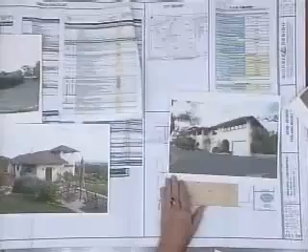Also, what we did in addressing the things we redesigned was the entryway to the house. Before we get into that, as far as the stairs go, we did decide to go ahead and keep the stairs just as is. My friend Mr. Cahill isn't here today, but I did go to the city and spoke to them. It didn't require a permit, but I wanted to let them know anyway that these steps here are pretty broken, falling apart and uneven, so he went ahead and had new stone put in.

Everything else is the same, he just put new stone in. There's a textured, chip-cut finish like this, though with the cast shadow in this photograph you don't really see that. Then we removed the grout and he evened out some of the steps here. This is the original front staircase, and this is just all under repair and maintenance. We removed the concrete colored grout and replaced it with sandstone colored grout, and the stonemason Rama chipped it, evened it and cleaned it up, and it looks a lot better. So we did keep it, and it looks a lot nicer now.

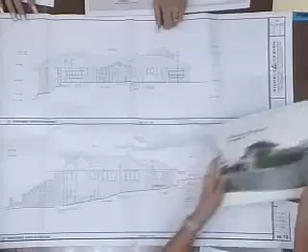This is our sample board. This is the cedar siding, 7/4 inch shiplap, and this is the color, the beige, for the trims, which will be smooth for the casings and trims around the windows and doors. This is the decking, the roof decking, and these are the doors and windows. We have some Marvins in there right now, and this will be what we use when we go in there.

I also brought a photograph just so you can see the roof decking. There we go. This is how it is right now, and they like that look, so we're keeping that. Obviously, the body of the house will be a little bit deeper and richer. And currently, if you recall, there isn't any casing around the windows, so we're going to case those out and give it a little more volume.

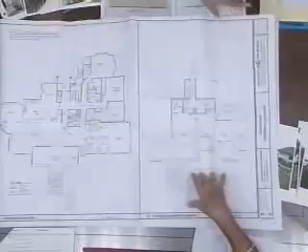So those are the window details, and as far as the driveway, we also discussed that. I told you they were planning to redo it—if you've been out there, you've seen it. The driveway is asphalt currently and does need some TLC, and they know that. They were planning on redoing it, so we are just... let me see.

We're going to put the pavers in. There are 3 sizes of the pavers. We're going to do just the border, the 9 by 4, I believe it's 14 borders on the edge. These are the colors in there, this is an actual sample, and it blends really nicely with the sandstone on the house.

Also, what we're going to do, which will lead into part of what Joni's doing, is address the hedge you can see in some of the street photographs in the file—you really don't see the house from Jimeno, plus it drops down. So we're creating a little entryway off the driveway over here. We're going to put a short wall in, and there's an existing hedge in here, so we'll have this little entryway with a couple of steps down leading to the front. Because what we have here is a road easement, and we studied that a bit, but without going through a lot of hassle working with the city on their property to create an entry over there, we elected to just go ahead and do this instead.

Okay, now let's look at the landscape. Landscape. All right, there we go. Get it back here. Here we go. Now they're toward the rear. Landscape pictures—I do. Some are clipped on, but it's maybe...

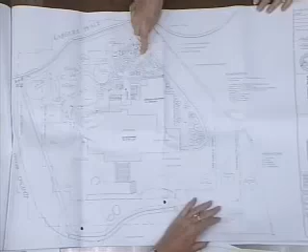We're taking out several trees. One is an avocado up in this right-hand corner here, and one is a persimmon tree that is going to be removed because it's right at the corner of the house. The avocado that is getting taken out is not healthy, nor does it produce very good avocados, so we're replacing it with a leptospermum, which is a lowish tree, but it has a multi-trunk and white flowers, and it will not interfere with any view because the neighbor above is quite high on the site.

I did talk with Ann Marks, and she came out to the site, and we talked about the landscape, and she thought that everything looked fine for her.

Okay, and just looking for your key here. Oh, well, here I have a separate plant list for you, so that you don't have to go back and forth. Oh, that's wonderful. How thoughtful. Okay.

And much of the landscape is already quite drought tolerant, so you can see by some of the photographs. So I'll give her one too, another picture.

Okay. Did you want to? Yeah, do you have one? Okay, good. Okay, that's all the points have been handled there.

All right, then we have some letters.

Michelle: Yes, thank you, Madam Chair, board members. I just wanted to read a letter into the record from Mike and Linda Cahill. The letter states: Dear Chair and board members, we respectfully request that in your deliberations concerning the above referenced property...

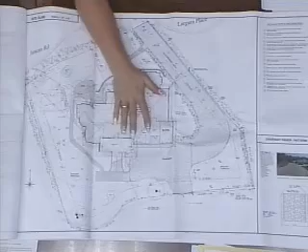I sure can. They are, if we go back to this plan here, they are located right over here. And see, one of the pictures you have over there has a snippet of his house.

Here we go, right here. This is Mr. Cahill's house. So this is over here. In the past, I worked on a previous adjoining property, and I did look up his floor plan. This is his master walk-in closet, this is his master bathroom window. These are two bathroom windows, and this is actually the transition, a breezeway between his walk-in closet and his master bathroom. So these are both bathroom windows here, just so you know, and the closet.

As far as his side goes, well this is a different thing, but we're just maintaining the hedge into here for privacy because he videotapes my clients through his bathroom windows.

Really? He explained to me he's doing that. In case a fire were to break out, my client's fire alarm and security system probably wouldn't be adequate, so he's keeping an eye on the house for them.

Oh my goodness, okay. But in theory, if he does remodel the house, he might want to put a window here, if he changes his master or his walk-in closet, whatever he might do, he might put a window there.

Okay, so then what about the lighting fixture? With regard to the light, currently there's an exterior light fixture on this side of the garage. We're removing it, and that actually faces his house. Now there's a light above the garage here and another light, and we're going to add a light over here on this garage just so it's uniform.

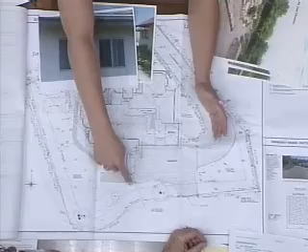One is required when we put the French doors here on the understory, and one is required at the exterior entrance, that's by code. We're not adding anything else. There's an existing post lamp over here, post light over here. We're not doing any landscape lighting whatsoever.

And as you can see from the photographs, he's got an oleander hedge, probably at least 25 feet in height along most of the property. My client, of course, has this hedge that's about 5 to 6 feet, it's a Ligustrum.

So if there were anything down here, and obviously these are bedroom windows over here, there's no exterior lighting here, there's none. We have step lights in here, so it shines directly down. I don't have any up lighting here.

We're going to add a post lamp that matches these, there are 2 existing ones, which is a low light with a hood on it. But any light that might spread over to here, obviously this hedge and this 25-foot oleander would screen anything. And his house is further down to here, so we're actually eliminating some lighting that faces his house.

Could you just show me where these 2 will be located on the elevation? And do you have photographs? You had pictures of the light fixtures too, didn't you? Yeah, I do, that's the sleeve. This is the light fixture that we're removing right there, and here's the existing one. We're going to add another one over this garage here, basically the same fixture. Correct.

And I believe that, they have obscure glass. Yes they do. Here we go, yeah, here they are. There we go, perfect. So we're improving the look of them, keeping them very similar to what's there, but just improving them a little bit. These are existing solar lights that they have on the brick pathway, and I just indicated those.

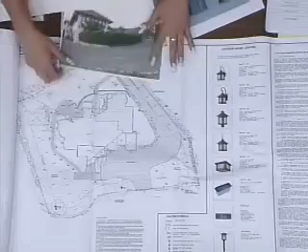And then finally, just my last question is on your new entry configuration, which shows up on an elevation, somewhere, it's a 6 and 7. Let's see.

Okay, I just wanted to see it. I have a comment, but I'll wait to comment. Okay, thank you. Anyone else? Any questions, comments?

Jim, you come. Yes, thank you. I think that's a big improvement.

Oh, Mike, and I did forget to mention, what we did decide also, if you look on the next page, I need a pen to write out here on the elevation, is that we had the curved, thank you, thanks. We were going to make these a tapered column, we decided to go ahead and keep those. We're just going to remove the rough texture that's been put on them and sand them down and make them smooth. So I thought if we're keeping the curved staircase, that this would tie into that better.

So are those wood? No, they're concrete. So you're going to smooth them down? We're going to smooth the stucco, yes. If you can, I'm not sure if I have, well you can't tell too much, but here's one photograph. Those are funny little columns, aren't they?

Well, somebody went and put like a textured coat on them, and they're slathered all over. They kind of did that in those days.

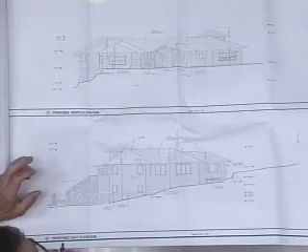But because you're retaining these other kind of very unique columns, maybe there's a way to introduce, not necessarily that column design, but some gesture towards this element of architecture that they used in 1910 on the front.

So that would be my only comment. Okay, anyone else? No comment? Yes, Brian?

I got informed by the city that it qualifies for a 3-star, and it requires compliance for 3-star on your Build Green Santa Barbara. The worksheet prepared currently is only saying that it qualifies for 1 star. So there's a few other things I need to go over with my clients previously - I just wanted to get that on there, so you know we're in the process of addressing that.

Okay, that's my only comment. All right, well, we can take some action here.

Madam Chair, I'll go ahead and make a motion. Please do. That we give this project design approval, that it return to the full board for review of details, and did we see a color board?

No, not yet. Oh, yeah, she had - I brought that. I think it's buried somewhere. Oh wait, sorry. Okay, the color board is here, we have some details.